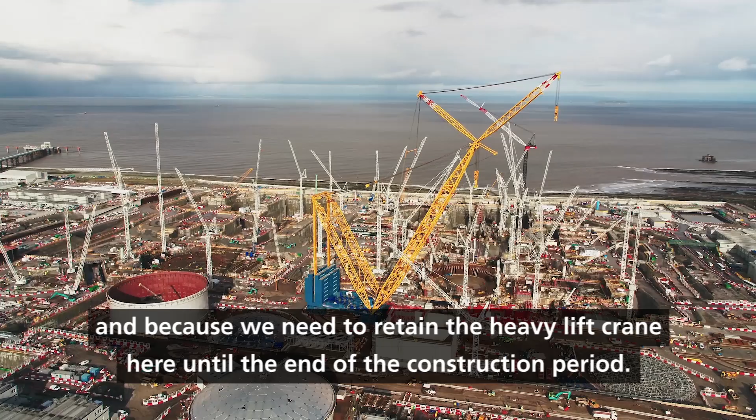The changes we are proposing are all to the operational layout of the main power station here at Hinkley Point C. They come about because of learning from other plants in our EDF fleet, because of updated safety and security protocols, because we have optimized the design of some of our buildings, and because we need to retain the heavy lift crane here until the end of the construction period.

The changes we are proposing fall into 4 categories. We have some new buildings, we are relocating some buildings, some of the buildings we are deleting because they are no longer required, and some of the buildings are getting slightly larger.

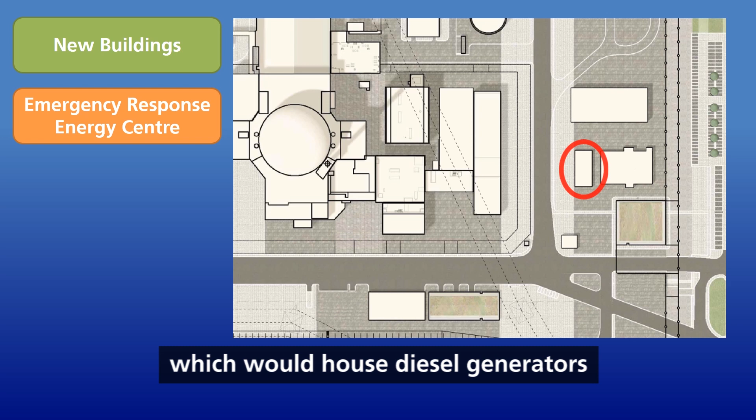New buildings. 3 new buildings are proposed within our application. A new emergency response centre, which would house the site's emergency control centre and provide an alternative access control point in the case of an emergency. A new emergency response energy centre, which would house diesel generators and fuel in case of an emergency.

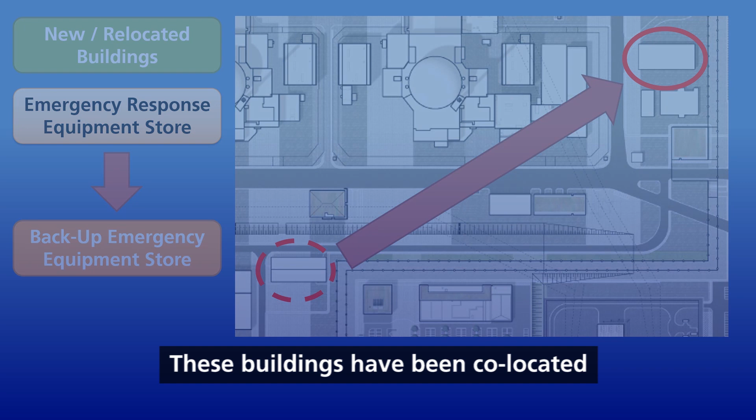And a backup emergency equipment store, which replaces the emergency response store. These buildings have been co-located on the layout plan to provide a base for responding to an emergency situation.

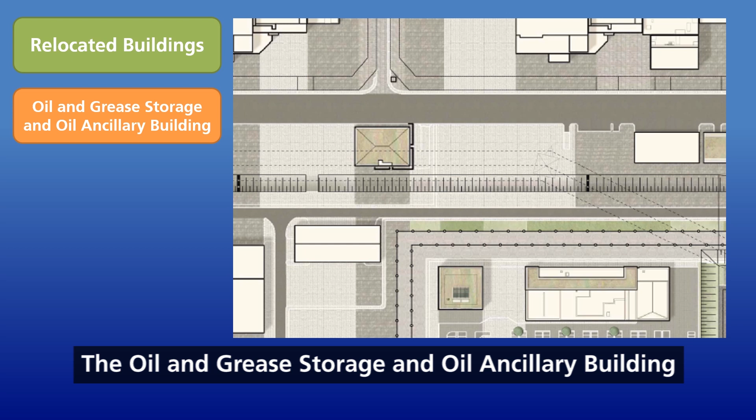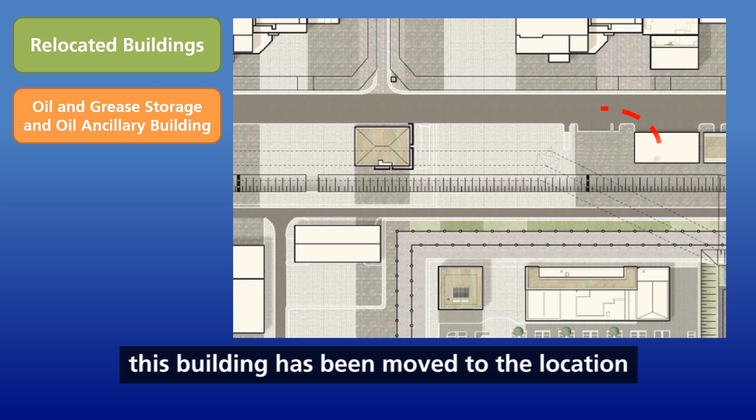Relocated buildings. The oil and grease, storage and oil ancillary building is required prior to Unit 1 of the power station generating electricity, and so in order to allow us to retain the heavy lift crane to complete Unit 2, this building has been moved to the location previously occupied by the emergency response store, which has been renamed and has been moved alongside the other emergency response buildings.

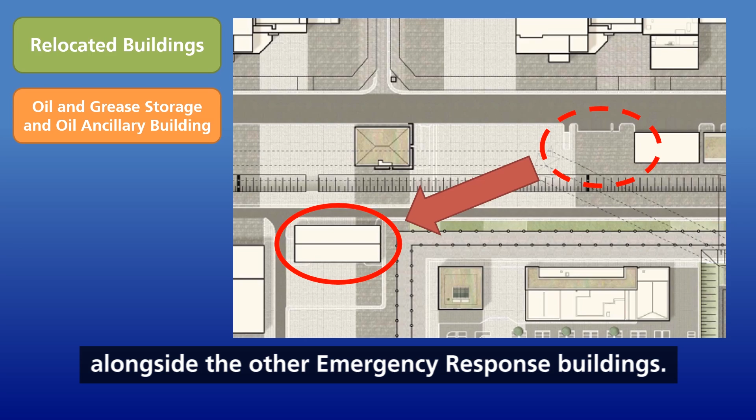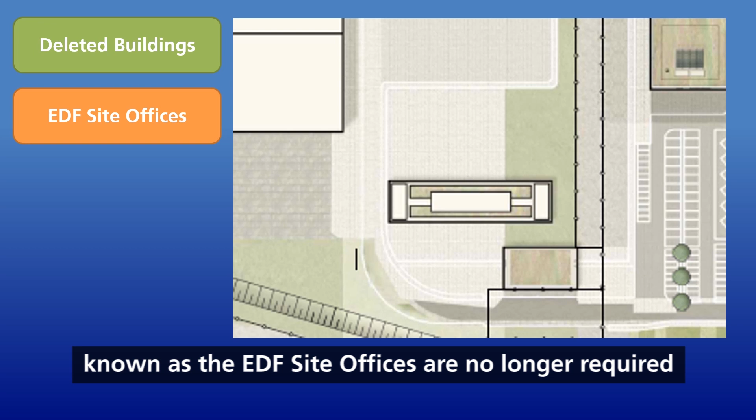Deleted buildings. Following a review, the separate building known as the EDF site offices are no longer required, and all office-based personnel will be located together in the operational service centre.

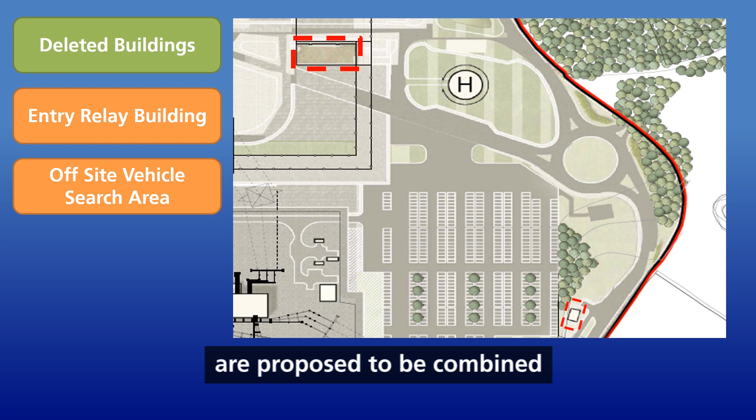The entry relay building and the off-site vehicle search area are proposed to be combined into one new off-site delivery checkpoint, where all visitors will report and all postal deliveries will be made.

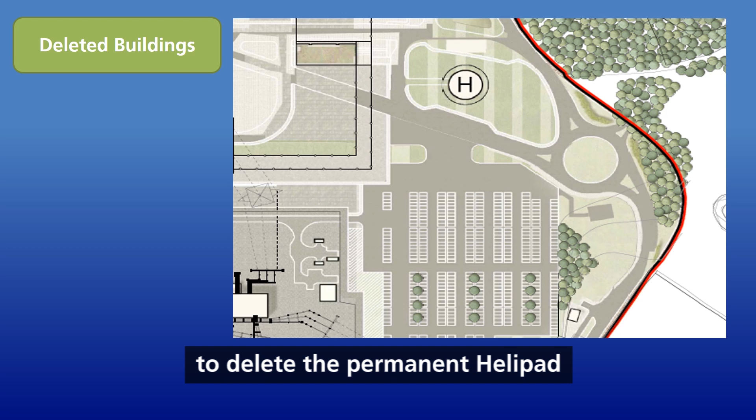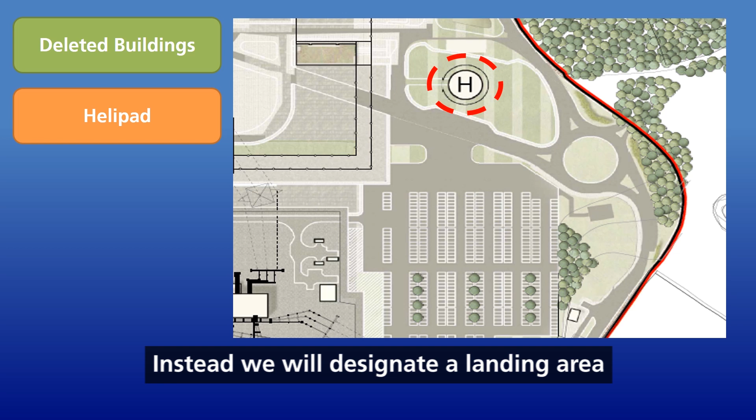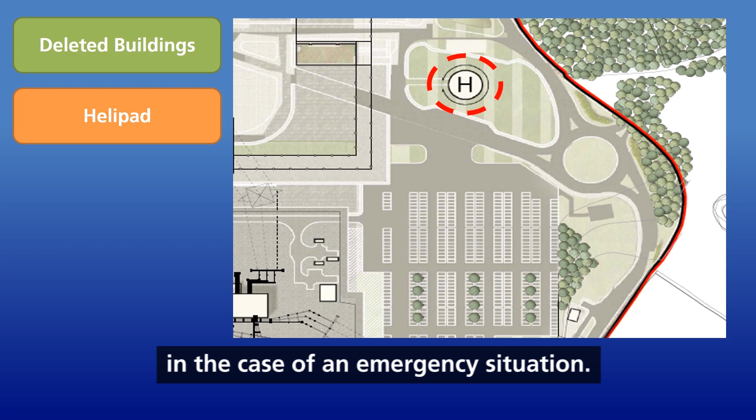In addition to these buildings, which are no longer required, the application proposes to delete the permanent helipad following a safety review. The previous location was deemed too close to the power station and overhead lines. Instead, we will designate a landing area outside of the operational power station, away from buildings and overhead lines, for helicopters to land in the case of an emergency situation.

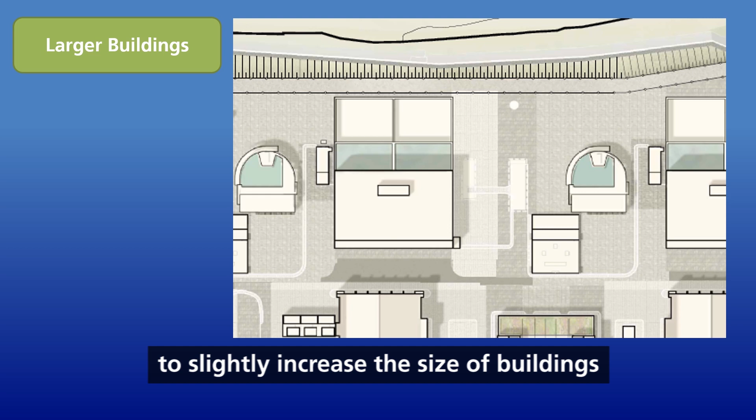Larger buildings. Further, more detailed design work has taken place, and this has resulted in the need to slightly increase the size of buildings known as the filtering debris recovery pits, one for each unit, and the permanent sewage treatment plant. The recovery pits require some additional equipment which is outside the size parameters previously approved.

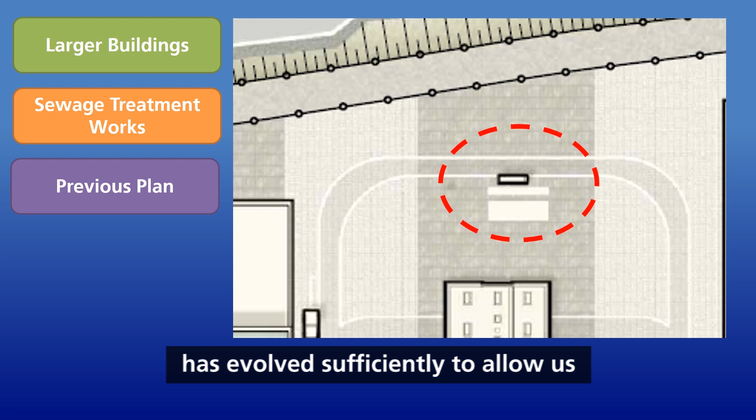The sewage treatment works design has evolved sufficiently to allow us to show the series of tanks and structures which together make up the treatment works.

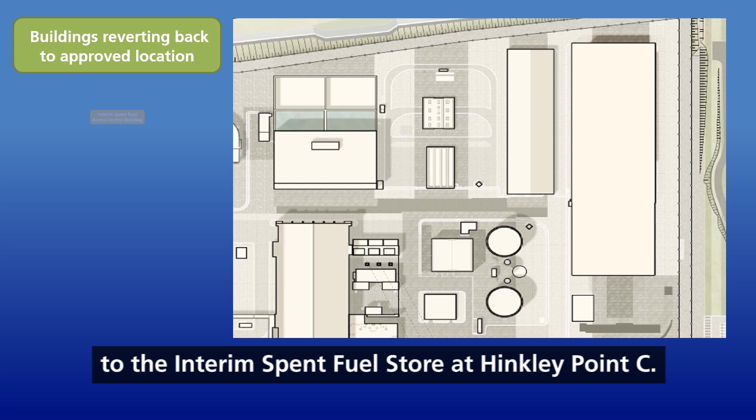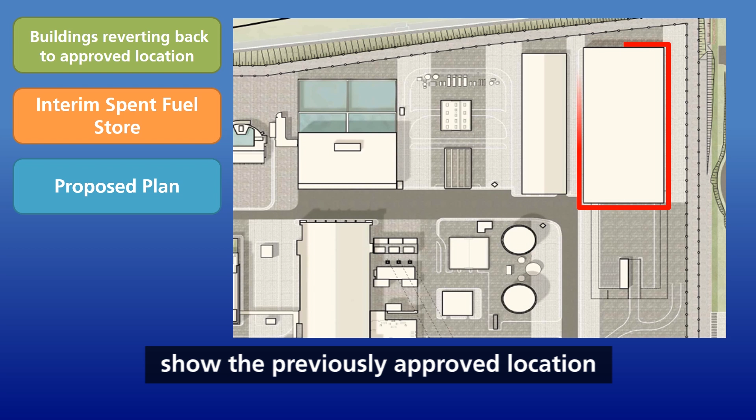Buildings which are reverting back to the approved location. Within the application previous to this, changes were proposed to the interim spent fuel store at Hinkley Point C. These changes were not approved within that application, and so the plans for this application show the previously approved location for the interim spent fuel store itself, as well as its access control building and the equipment store.

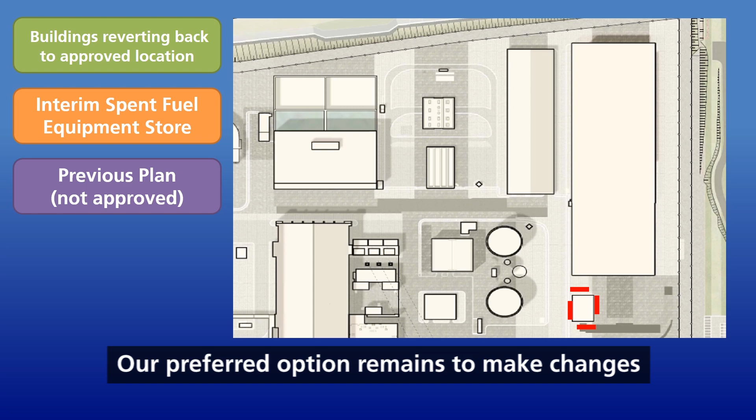Our preferred option remains to make changes to these buildings, but they are not required until after the power station has been operational, and so we have decided not to include these proposals within this application.

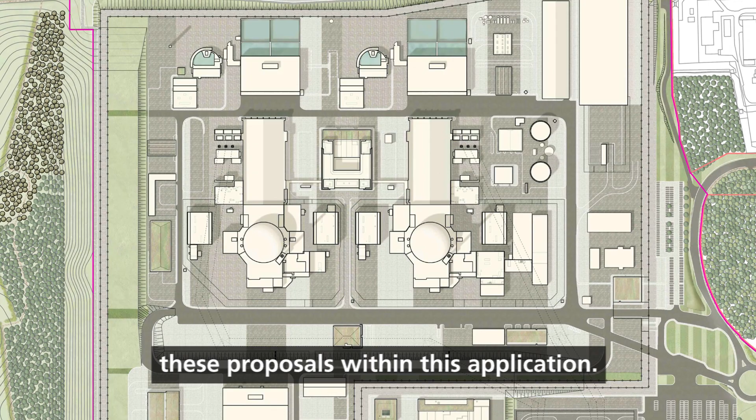Our application includes a range of assessments against a series of environmental topics, including a landscape and visual impact assessment. Our conclusion is that there are no material differences between the effects as assessed in the original application and our current proposal. If you would like to formally comment on our application, you need to send your representations to the Planning Inspectorate so that they can be considered by the Secretary of State.

As I mentioned, all of the plans and application statement, alongside a link to the Planning Inspectorate's website where you will also find the material, are available on our website. Our application material in hard copy is available for inspection at our facility in Cannington Court.